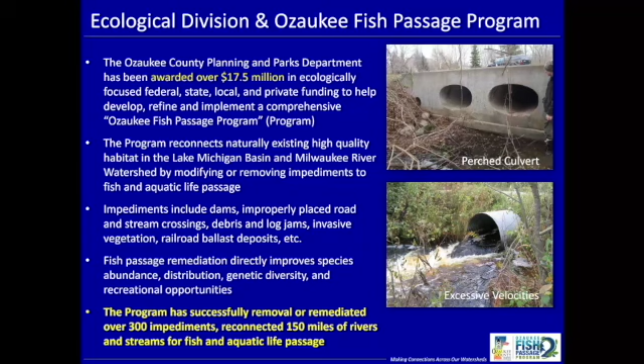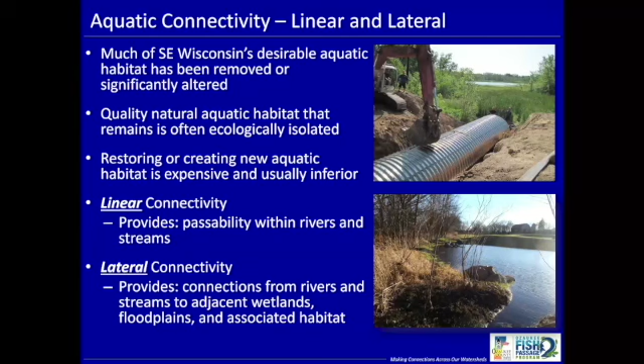Wanted to talk a little bit about the type of impediments. So we look at impediments both for linear connectivity, so kind of in-stream, provides passability within rivers and streams. So these would be your culverts, your dams, etc., trying to address those. But we've also been working on kind of corridor restoration, where we look at lateral connectivity. So that's providing fish and aquatic life with connectivity to adjacent wetlands and floodplains. Many of these organisms need those for spawning and reproduction. And so much of our work lately has actually been focused on kind of holistic corridor restoration, but we always start with linear connectivity, because first you need that stream connection and corridor.

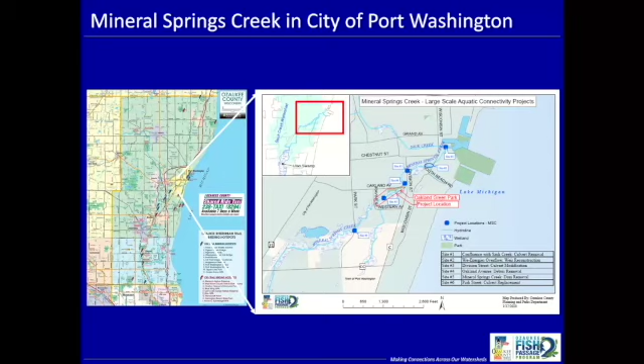So just a little bit more background on Mineral Springs Creek and its location. It's in the Sauk Creek watershed. So Mineral Springs actually drains into Sauk Creek, just about 100 yards from Lake Michigan, the mouth of Lake Michigan. You can see that is the purple colored watershed on the right-hand side map.

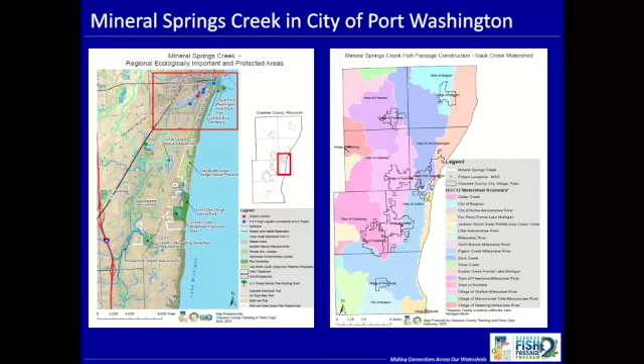And Mineral Springs Creek is actually in a really important regionally ecological area. Many of you are familiar with Port Washington. There's obviously the harbor, Lake Michigan, and Mineral Springs Creek comes right into that, to the harbor. But just a little bit to the south there, there's the 590 acre Ulao Swamp natural area, and then the other natural areas along the coastline, Fish and Wildlife properties, as well as Lions Den Gorge Nature Preserve, one of our county parks.

I have a number of videos, and I'm hoping that they will translate well here. So I wanted to show you first a little aerial view that we were able to get for the Mineral Springs Creek watershed, and I'm going to try and play it. So here we're looking south. The Mineral Springs Creek corridor is right where that lettering came up, the title.

You can see how close it is in proximity to Lake Michigan, and for those of you familiar with Port Washington, there's obviously the We Energies power plant, the bird sanctuary, Coal Dock Park, looking off to the east. As we pan around, you can see the harbor and downtown Port Washington. So Mineral Springs, we're backing up now on the corridor. It comes in right by the We Energies power plant.

And for a very urban setting, Mineral Springs Creek runs through the industrial park in the city of Port Washington. It actually has a very nice corridor, and I hope to show that to you tonight. But there you can see it in the foreground, an aerial view in proximity to Lake Michigan.

So I wanted to talk just a little bit more about Mineral Springs. It's about a 4-mile stream, so it's not super long. And as I mentioned, headwaters at the Ulao Swamp. So it connects to some really high quality wetland habitat, not only at Ulao Swamp, but along the corridor as well, over 195 acres. So for a short stream, it's got a lot of potential spawning habitat for all kinds of fish, particularly phytophilic spawners, which spawn in wetland areas, like northern pike.

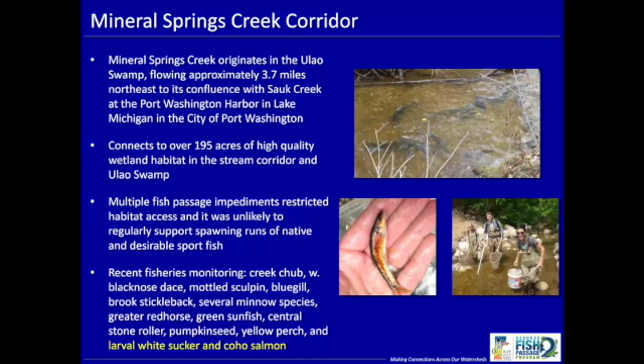But it's been impaired by a number of impediments that we've been working on removing, and I'll talk a little bit more about that. And we've also been doing a lot of fisheries monitoring. You can see there in one of the photos, steelhead. So we actually documented now for the first time reproduction of steelhead or trout species in Mineral Springs Creek, which while not a native fish, is part of the Lake Michigan system now, and an important sport fishery. But nonetheless, we have found that it's been productive for a number of species and many native species.

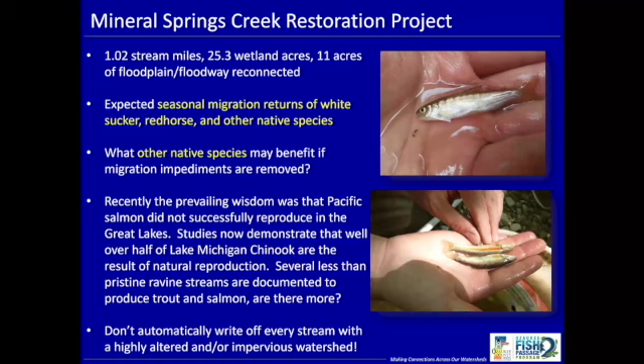So our restoration project aims to work on about 1 mile of that 4-mile corridor, working towards restoring about 25 acres of adjacent wetland habitat and about 11 acres of floodplain. And we're really focused on the native species. So we're looking at white sucker, redhorse, and other natives that need that habitat for spawning and migratory passage from Lake Michigan. And there probably are many other native forage fish species that would benefit by the work as well. So we're definitely looking forward to starting a project.

Restore and enhance adjacent habitat; particularly we have a focus on migratory birds and providing stopover habitat, because while it's in a very urban setting in Port Washington and in the industrial park, it does actually have a very nice intact corridor along that stream. And then the coastal resiliency part also comes into protecting infrastructure from future storm events, and I'll talk more about that.

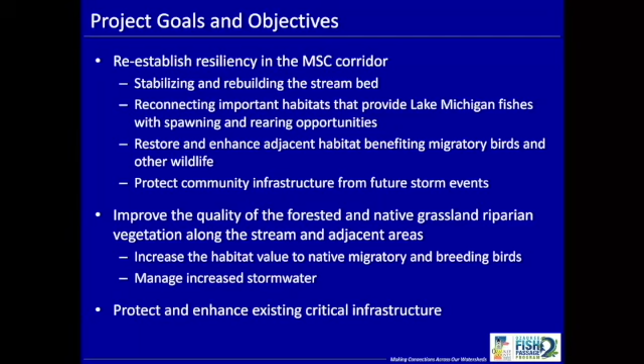So at the upstream end of our past work, and hopefully our future work on the corridor, is Park Street. Those of you familiar with the city of Port Washington, South Park Street, we did some work there, and I'll talk about that. That is also the top end of our future corridor project.

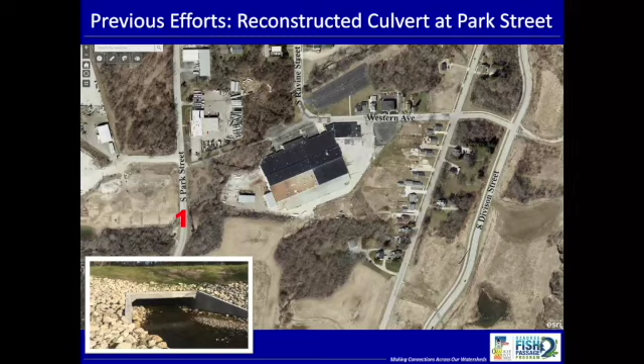But historically at Park Street, as you can see in the photo here, there were 4 barrel culverts providing significant impediment to fish passage. In those culverts, the flow was too diffuse and spread out, so it was actually a low flow barrier. In other words, there wasn't enough water for fish passage. The culverts were all structurally failing, and they were extremely long.

So we undertook a project to remove all of those culverts, in conjunction with a private contractor and our county highway department, and place in a new single concrete culvert. And we put some in-stream habitat through that culvert so that the stream corridor through the culvert looked a lot like the stream corridor outside of it, providing in-stream habitat for fish.

And the project, for those of you curious, was just about $225,000. It was actually a fairly large project with a lot of utilities and so forth.

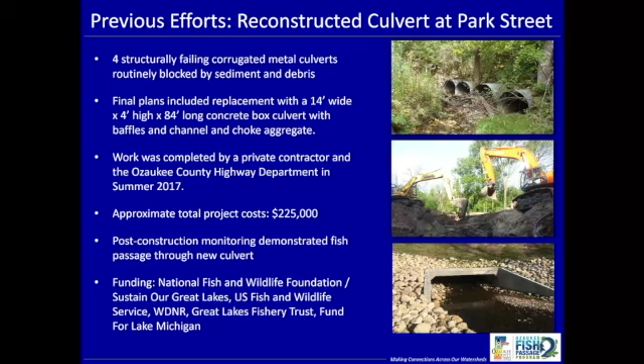So I'll transition from that project at the upstream end to South Ravine Street, and this is where our current efforts are going to be focused. For those of you that are familiar, the corner of Ravine and Western, seen there in your photo.

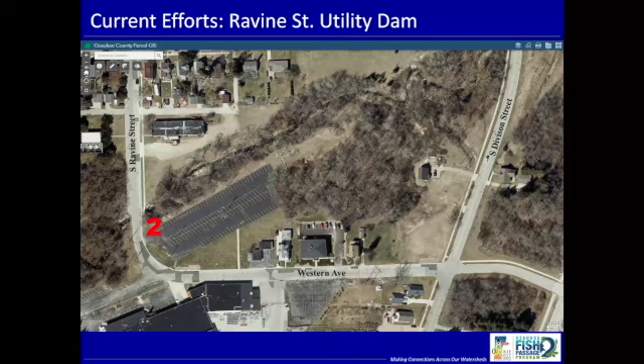In 2018, and those of you in the city of Port Washington would know this, we had a very significant rainstorm. A little over 9 inches of rain fell in less than 24 hours, which was about a 500-year flood event. That flood event created significant erosion throughout Mineral Springs Creek, which is still a little bit flashy because of the land use around it. It was so powerful it scoured the stream bed about 2 to 3 feet down.

One of the detriments of that was that there are a couple utility crossings across the creek, and the primary one you see here in the photo was a large sewer main that supplies the industrial park. That sewer main historically crossed underneath the creek bed, and when the creek bed scoured down, it exposed it, and it was hanging above the creek bed. You don't want a sewer main, especially that size, unsupported from below.

So the city of Port Washington undertook some emergency measures to shore up that main sewer line that served the industrial park. But in doing so, unfortunately, it created a fish passage impediment, isolating all of our work at Park Street, the first one I showed you just upstream from here, negating all that work and funding, and it created this dam as you see here.

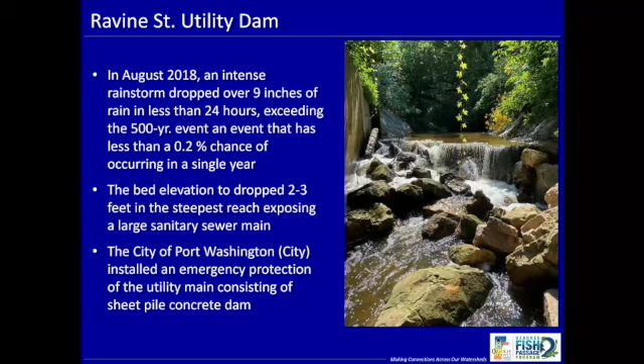What they basically did was drive sheet pile on either side of this sewer main and then pour concrete over it, essentially making it impassable. In this next slide, you can see it essentially created a dam.

And you can see here's a number of fish. I know they're a little hard to see within the rocks, but a number of steelhead and trout and fish that were abandoned that couldn't get over that rock spillway or the dam. And as I mentioned, it kind of isolates the whole upper watershed now, again back to where it was before we did some of the previous work that we had done on Mineral Springs Creek.

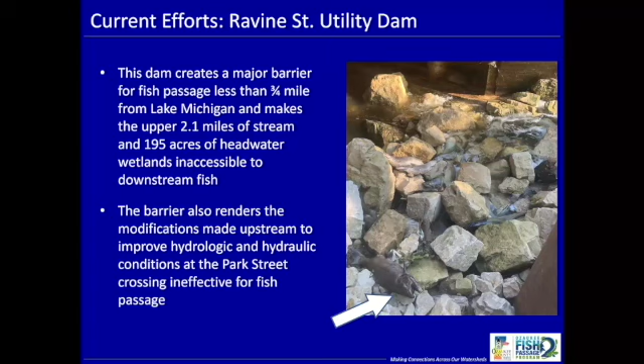So our current project is to remediate this effort. So here's just a video. Oh, I guess it's not playing yet.

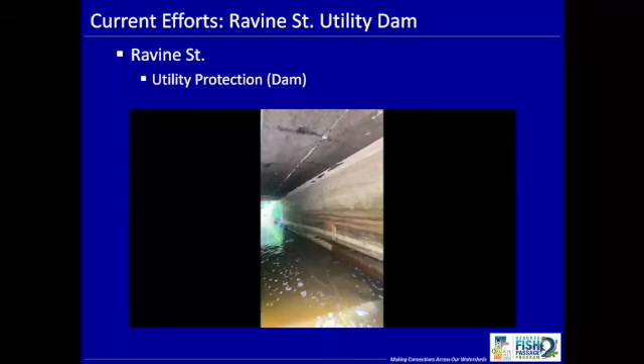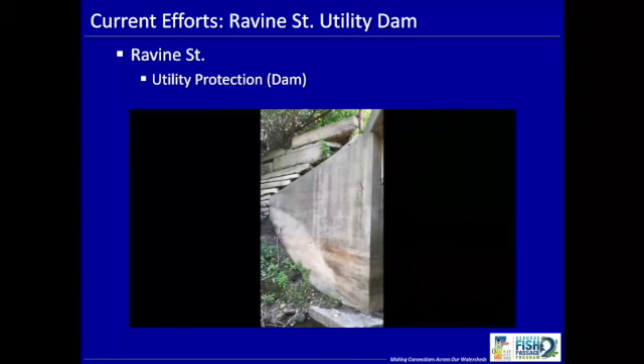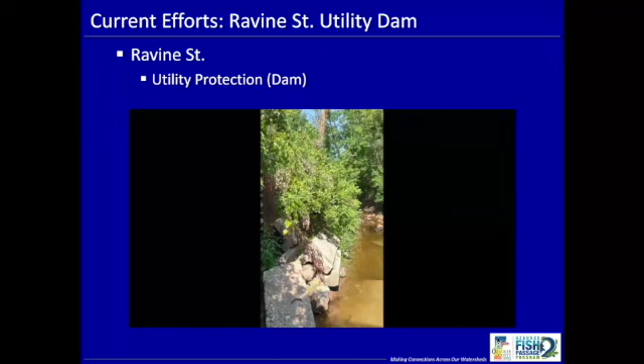Here's a video of that utility corridor and the dam as we get to it here. And you'll see it goes then through a bridge, which is actually a bottomless culvert technically, so that itself is not a fish passage barrier. You can see that there's some infrastructure issues with the culvert or bridge itself that need to be repaired. But the passage is good through the culvert as far as aquatic life is concerned. But there is obviously some additional infrastructure issues there.

But in addition to that, we want to fix the stream corridor and the in-stream habitat and make it passable for fish, but we are also looking at this more comprehensively by restoring the corridor, because we know that that storm event also created a lot of significant erosion, which I'll show in upcoming slides. So we're looking at doing some vegetation restoration within the corridor specifically, but then also hopefully in Oakland Green Park, so where we can, adjacent to the corridor, we can provide some upland habitat as well.

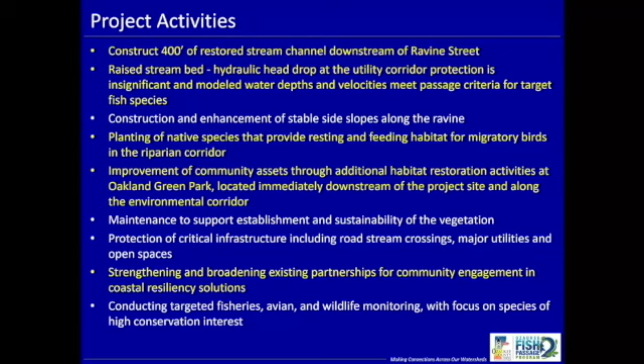And all of this is in an effort to continue to strengthen partnerships, and particularly like the neighborhood partnership that Western Great Lakes Bird and Bat Observatory has, work with volunteers and get people involved in some of this community restoration work.

This next slide, I'm working downstream now as it comes up here. So this is kind of site 3. So another part of our funding request has been to protect critical infrastructure. So that's both public, like the sewer main I mentioned, but also private infrastructure. So there are a number of existing buildings immediately along the Mineral Springs Creek corridor, the parking lot you see there, private business. And so we want to make sure that those sites are protected too, because with that storm, we had significant erosion of the banks. And hopefully this video will work here in just a minute.

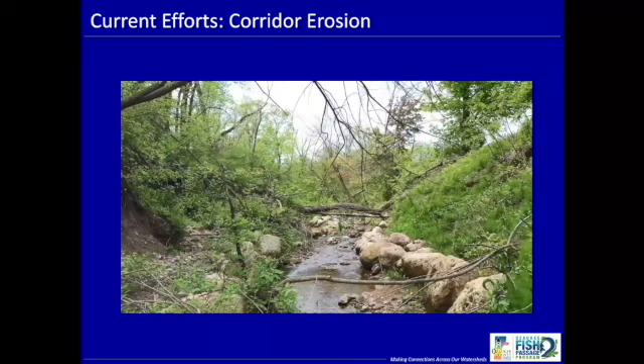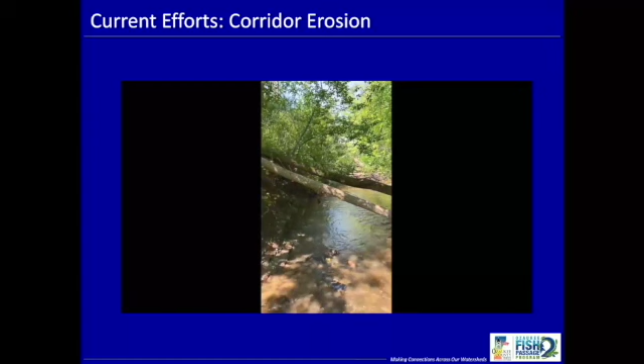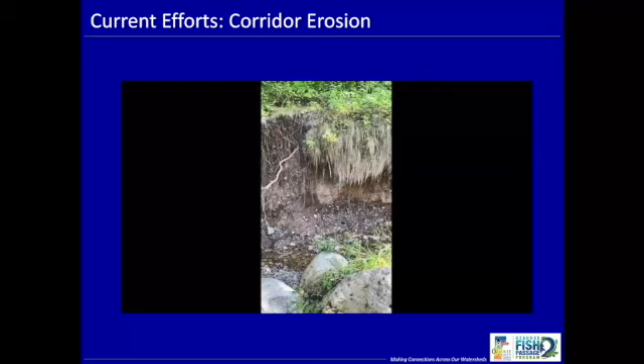So this is at site 3. This is kind of showing the aftermath. We had significant bank erosion that really tore out a lot of the vegetation, made unstable steep banks through this site. You can see the significance of it there. That's one of our interns. She's only 5 feet, but still a super high bank. You can see it scoured right underneath all the vegetation. So part of our work will be to restore that corridor habitat as well.

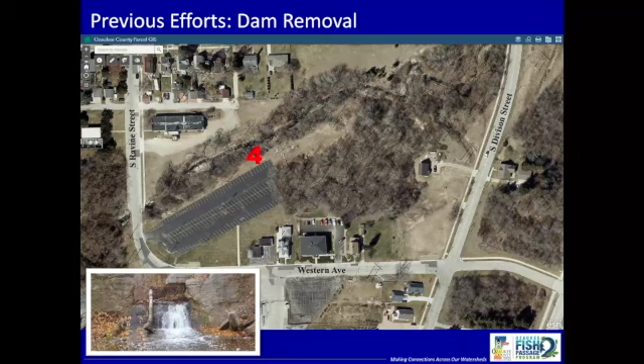Working our way downstream as this next slide comes up, this is both a current effort and a previous effort. So our previous effort actually was a dam removal at this site. You can see in the lower left-hand corner the dam just before we removed it. And I just wanted to take a minute to talk about the historical significance. So Mineral Springs Creek is actually really interesting. They used to actually bottle water out of Mineral Springs Creek and sell it. There was actually a bottling plant at the south end of the street. The building is still there actually in the city of Port Washington.

They used to bottle water, but they also used it. You can see here in that historic photo of the dam, it doesn't look anything like this now, of course, but where that parking lot was that I showed you, they used to dam up the creek and create a large impoundment, and they used to use that for ice blocks to put the fish on. So it supported all the fishermen in the port coming in with their fish. Back then they didn't have refrigeration, so they would cut ice blocks out of the dammed water. So that's why the dam was there originally. Obviously, it hasn't functioned in that capacity in many, many years.

You can see on the lower right-hand corner, the dam had been failing over many, many years, although it was still a significant barrier to fish passage, which you can see in the lower left-hand corner. All those dark shadows are fish that can't pass, primarily coho and chinook salmon, but many other species wouldn't be able to pass as well.

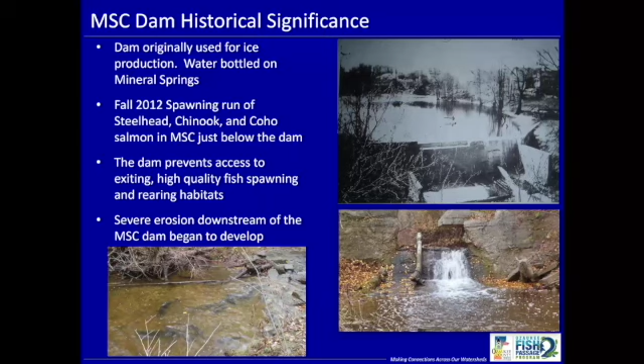And I just have a little video to demonstrate that not only was there a dam, but a large concrete pan that took the force of the water coming over the dam. Oops, that one didn't play. Let me see if I can go back to it here. Give me 1 second. Hopefully I can get this one to play.

So it has a large concrete pan, and you can see that that's problematic even for the strongest swimming fish. This is some Chinook salmon and trout trying to make their way up not only what's remaining of the dam, but also that concrete pan. So we worked towards removing that to restore the aquatic connectivity. I apologize, I think the video is a little bit slow here, but hopefully you get the picture.

So it was a significant impediment. These salmon are some of the strongest swimming fish, so we know if they can't pass, most everything else is not going to pass either. And so often when we talk about impediments like this as barriers, they're almost complete barriers to aquatic passage.

So just real quick on that dam removal, we should get to a summary slide here in a second. We did a full dam removal and restored the corridor. We did the design and engineering, and then our highway department actually did the demolition and restoration work, and this was done in 2016. The project was very cost effective at $85,000. Very few dam removals you'll find that cost that little, and this was a significant one.

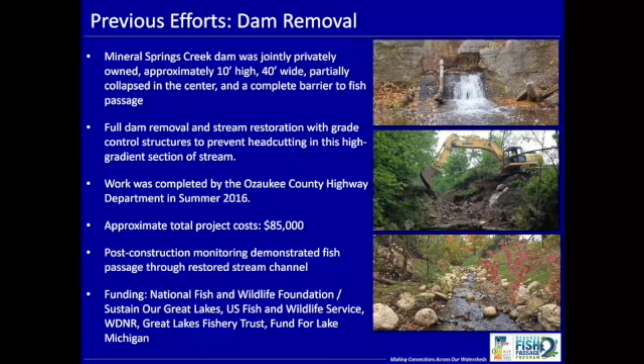But we've found that using our highway department has actually been extremely cost effective, and you can see here some of the funders and the stream corridor as it existed after our restoration work there on the bottom. And I just had another video here coming up. I'll try and play this one too. I won't probably let it go the full length. Whoops, it didn't work. Let me see if I can go back. I thought it would be interesting if you can see this.

This is how you remove a dam, kind of brute force. We actually just chipped away at the dam. Fortunately, it was significantly compromised already. But it was a high dam. Originally, I think it was a 10-foot dam, and you could see that from those historic photos. So this is our highway department doing some of that deconstruction work. Maybe you can see in the back there the excavator working on the channel and the restoration work that we did.

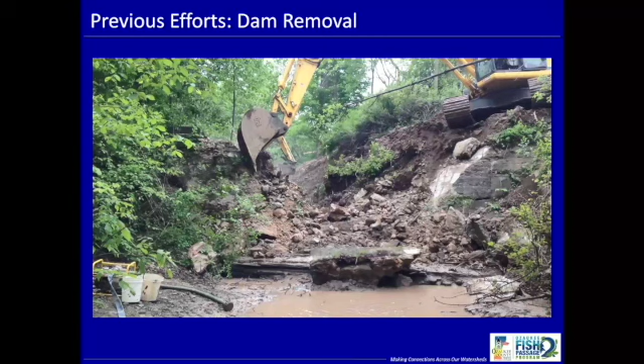I'm gonna jump into another video right away here. Hopefully it'll transition. And this video just shows, even after removal of the dam, the downstream end. So this is the end of our project as this video pans downstream here, and you can see that there's significant scour below the dam. Unfortunately, we didn't have funding at that time to address that.

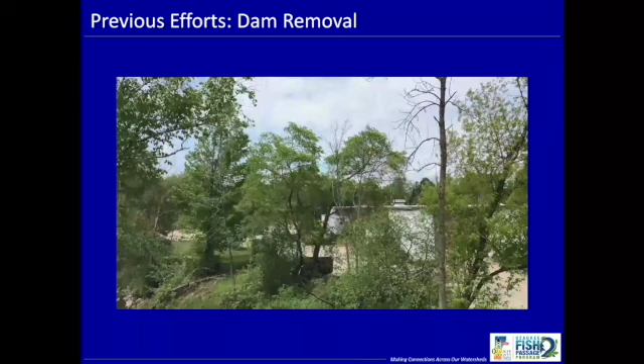And then this just shows again coming up out of the trees here, proximity to the downtown and Lake Michigan. You can see the We Energies power plant there in the background. And this is coming back down with our drone footage here, looking upstream at the same site, that private infrastructure that I talked about.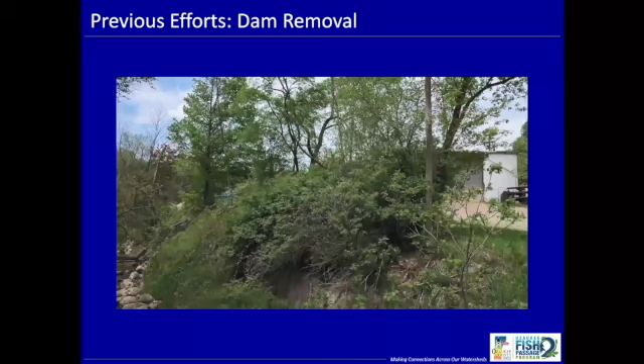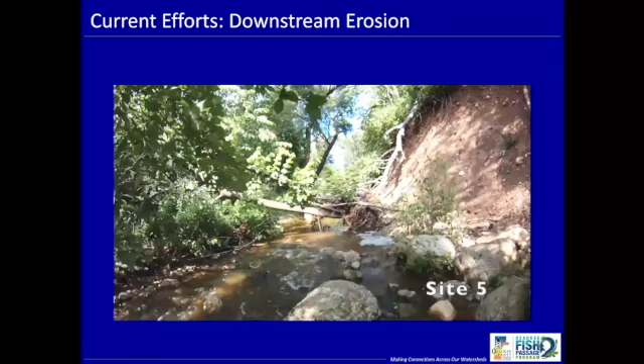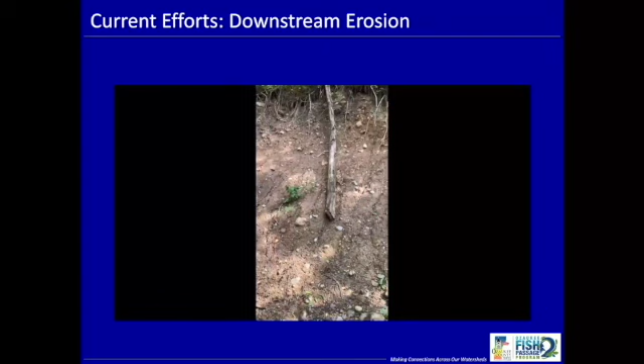So I'm going to keep moving on downstream to Site 5 here. And this is just part of what we hope to work on, some of that severe erosion that again occurred along the stream corridor. And again, just a video tour of that stretch of the stream. So this is below the dam. Some of this erosion had happened prior to that storm event in 2018, but some of it happened during that event. You can see steep, high scour banks that we hope to work on restoration for.

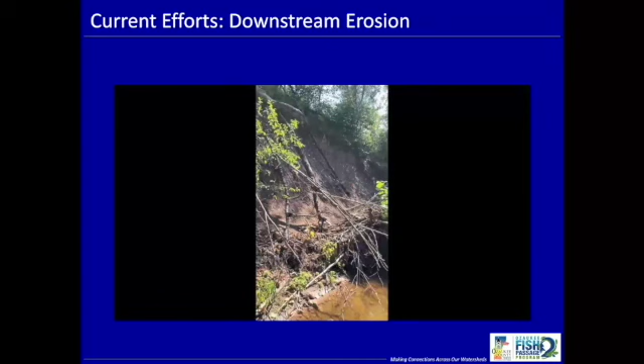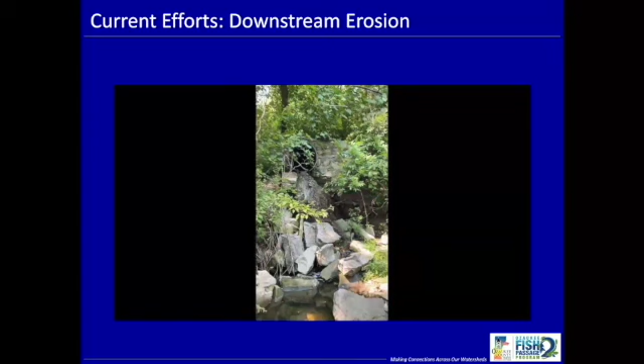And there's also some city infrastructure that comes into Mineral Springs Creek, and we want to try and address that too. So you'll see here coming up as we pan along the side of the bank, I think you'll be able to see not only the downstream end, but there's the stormwater pipe that comes into Mineral Springs Creek. So trying to do a little bit better addressing of that stormwater as it comes into the creek so we can protect the creek corridor as well.

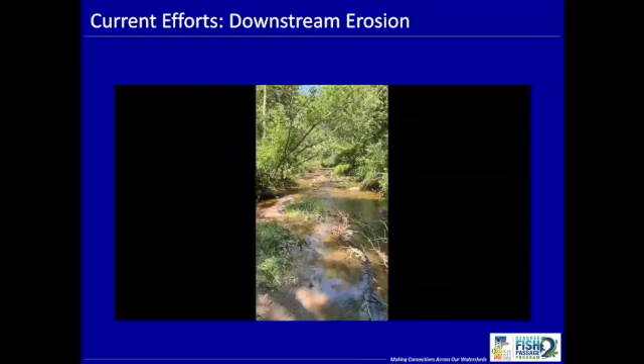And then keep on moving downstream, section 6 here, if you will. And this is an area of actually some really interesting wetland area. This is actually a particularly nice place to go birding. There's some really interesting habitat down here. So there are some adjacent wetlands that we hope to do some restoration efforts on.

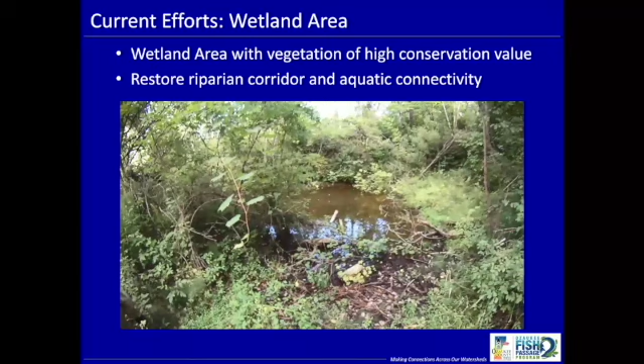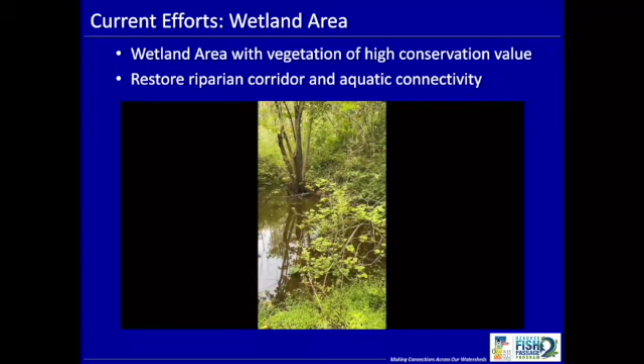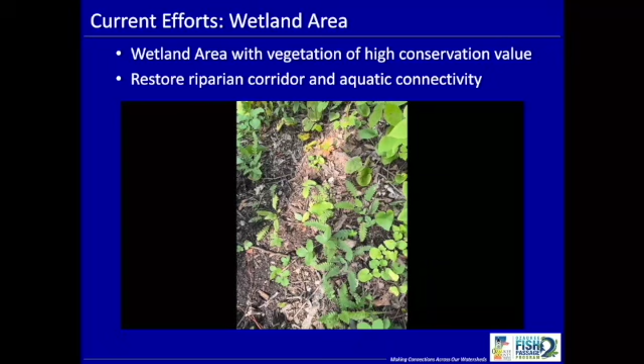And while there are invasives and other things in there, something that we hope to work on and improve, there is also some really good vegetation within that corridor, some native dogwood, and some other species that have a high conservation value that we hope to protect. So very interesting what exists right in the backyard there in that very urban corridor. So we hope to do some of the wetland restoration work in that area.

And then moving down further, this is what I mentioned. There's a tributary stream that comes in just below that wetland complex, a tributary to Mineral Springs Creek. And again, just going to show you a little video of that, where that tributary stream comes in. And we want to do some work there because this is also a great area for spawning habitat.

You can see there the riprap on the left-hand corner, that goes up to Oakland Green Park, just to give you a little perspective of where you are in the stream corridor. But overall, you can see it's a very nice stream corridor. And we've found that Mineral Springs Creek is extremely productive from a fishery standpoint.

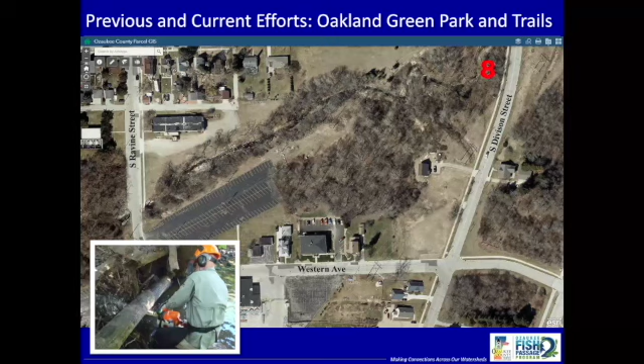And then keep moving on downstream. This is Site 8. So this was a site adjacent to Oakland Green Park. So this is both previous and future efforts. So some of our previous efforts were to remove a number of log jams, significant log jams. We don't like to take woody debris out of the stream because it provides good habitat, but when it actually creates an impediment is when we do the removal.

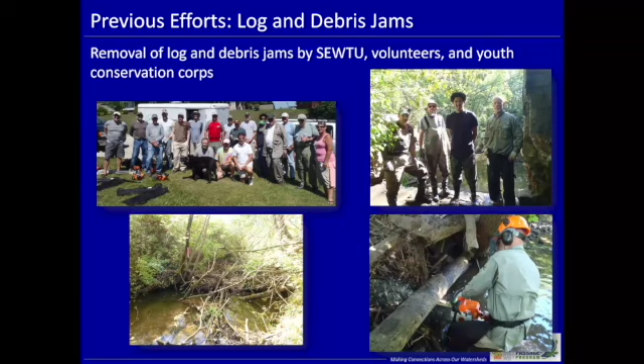So in this case, we actually worked with the DNR warden, you can see there, and a big group of Trout Unlimited, and they helped us actually chainsaw up and remove some of these really significant log debris jams. We also, just a little bit down at Division Street, worked on restoring a culvert for passage. So you can see that little bit of lip there.

Our native fish don't jump, and they are not strong swimmers with high velocities, and in this case, you can see the dispersed stream flow because it's spread between two culverts. So a lot of times the flow is so thin they can't get up either. So the restoration on the right, that's a before and after, you can see we filled in the scour hole, and so there's no longer a lip on the culvert.

And if you look real closely into the culvert, you can see we put what's called some baffles. They're actually curb stops to create a little low flow channel so that the flow can get concentrated and provide enough depth for fish passage upstream. So this is at Division Street, work that we previously did.

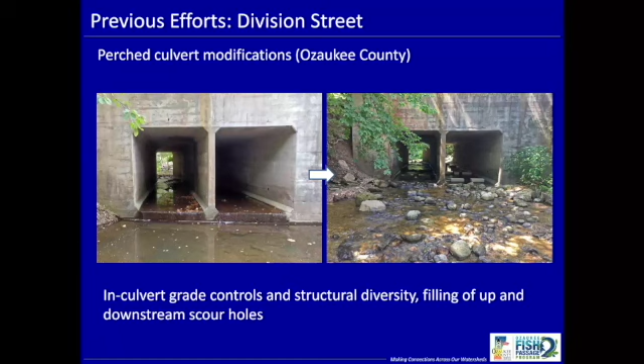And this next one is a video just showing what we hope to do future work on. It's just showing proximity of that corridor to Oakland Green Park, which is a nice lawn area, but we're hoping to work with the city and Great Lakes Bird and Bat Observatory to do some restoration work here to make it better habitat for upland and migratory species of birds and semi-aquatic life.

Here you can see we hope to improve some of the public access from Oakland Green down to the stream corridor. This is kind of a self-made trail and bridge there. We hope to do some improvements on that public access, but as this next slide will show, what we're hoping to do in Oakland Green Park is some native prairie restoration work, native prairie plantings, hopefully get in some bluebird nest boxes.

And I need to talk to Jen about the extras that she has. But we hope to do some restoration here, and I think it's a great opportunity, and the city seems willing to work with us on that as well, and would provide a great buffer to that stream corridor.

In addition to the prairie work up in the grassed area of Oakland Green, we also hope to work on tree planting along the entire corridor, so not just at Oakland Green, but along the whole corridor. And we've done similar work like this with volunteers, youth conservation corps groups, and other partner groups like Ulao Creek Partnership. This is an example at Ulao Creek where we've done a lot of tree planting and habitat restoration, and we hope to do the same thing through the Mineral Springs Creek corridor.

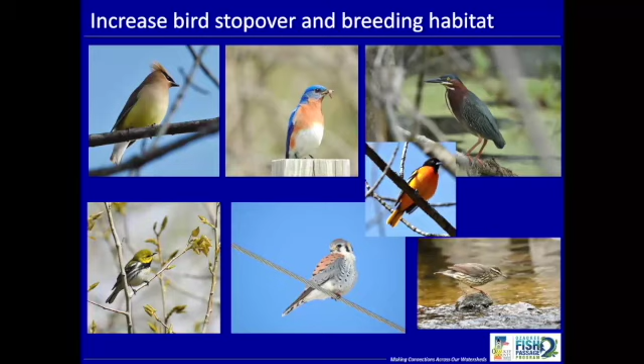And then I'm going to move down to our second last focus area site. So a couple of years back, we worked with We Energies. The downstream end of Mineral Springs Creek goes by the power plant, and they put in a relief weir, or a dam, if you will. And you can see it there in the lower left-hand corner.

What happened is, not even under significantly high flows, even at modest flows, the creek would get diverted because the bed was filling in below the dam. The sediment was falling out at this dam because it was right on a turn, and it was filling in, and so the water would spill out over the spillway, which was only intended to spill during heavy flood events.

But what's happening is that it was actually going over that even in a 2 or 3 year storm event, which isn't all that significant, just a regular rainfall. It was going over, and what was happening is the lower part of the stream corridor was basically dry, completely dry, because everything was going out the diversion.

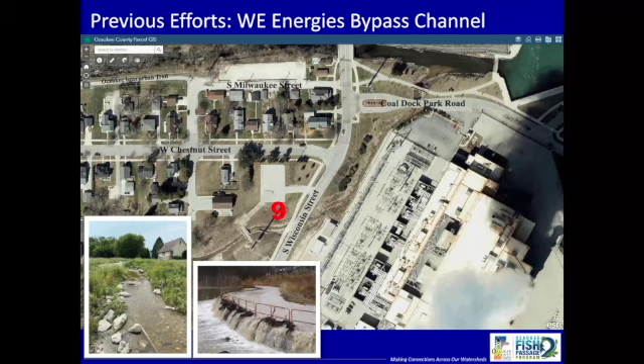So we worked with We Energies to create a new bypass channel that was not on a turn where all the sediment and materials would drop out, which also is saving them a significant amount of dollars in maintenance activities. For those of you familiar with City of Port Washington, you've probably seen it, but we've created a separate diversion channel that actually follows the old stream channel before it was diverted for the power plant and the overflow. We created a new stream channel that can actually hold the base flow of the creek without filling in, so we don't get the same impairment.

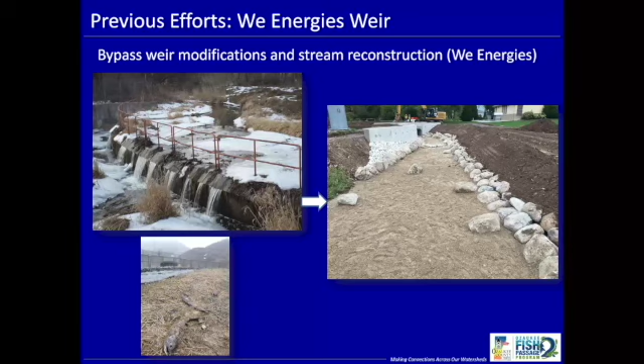So this video will show you that stream corridor as it exists today. It's holding that base flow. You can see We Energies is still doing some work here on the power poles and stuff. So this is another site where we hope to do some upland restoration with prairie plantings. But you can see that stream corridor is much better now. There's a base flow that runs all the way down through the passage underneath the street there.

And this is the overflow that I was talking about. It's dry like it should be, except under major storm events to protect the power plant. But we can keep and maintain a base flow all the way down along the power plant through this really nice habitat. And again, under low flows, that does not become a barrier now.

And the last site, most downstream, is the confluence with Sauk Creek. And the whole thought about working on Mineral Springs Creek started with the City of Port Washington's efforts at Coal Dock Park, and actually the removal of this significantly perched culvert you can see in the lower left-hand corner. This was done as part of the Coal Dock restoration, and it was the impetus for us to work on all the rest of the work upstream with the dam, etc.

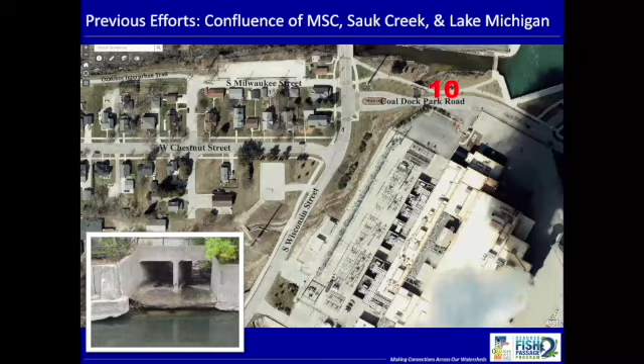That was a significant passage barrier. Nothing got by it, and it basically shut off all of Mineral Springs Creek, which, by the way, in historic documents, there were huge runs of white suckers up Mineral Springs Creek, so we know it was historically very productive. And there you can see what the city of Port Washington did. They fully removed it, put in a new wooden bridge, and that access and aquatic connectivity is much better now.

And this next one is just going to show you a video of that most downstream end and the confluence with Sauk Creek. That new entrance, which is so much better than the old culvert. And again, you can look upstream to Sauk Creek here, which also provides habitat. As I showed in that first slide with the watershed, Sauk Creek's a very big watershed, and Mineral Springs Creek is part of that.

So with this nearing the end here, I just wanted to provide you again an overview of the Mineral Springs Creek corridor. We got some really great drone footage, and this again just shows you that corridor coming up from the top end, looking down. So there are some significant industrial plants and stuff, but if you follow that wooded path down, that's Mineral Springs Creek corridor. Its proximity to Lake Michigan and the power plant.

It really is a hidden gem, and something that we hope to bring back to its former prominence and importance with the fisheries, but also hopefully make some improvements with the upland habitat along that corridor as well. We've worked with a number of partners on the previous work here, all outlined in blue, and we hope to work with some new partners like Western Great Lakes Bird and Bat Observatory, and also the newly formed Ozaukee County Watershed Coalition. So we're really excited about continuing this work and making Mineral Springs everything it can be.

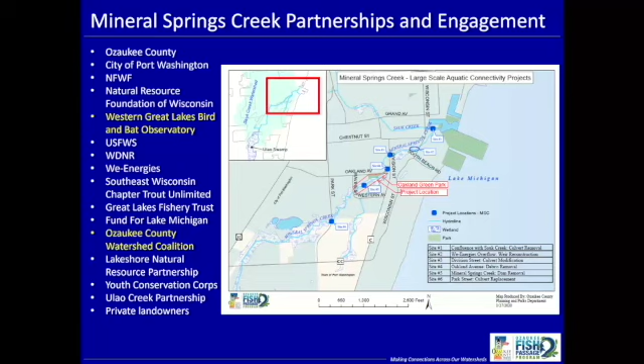And with that, I'm glad to take questions. This last slide just shows many of our funding partners that have helped with this work over the many years that we've been working on Mineral Springs. And we hope to hear about a large grant through the National Fish and Wildlife Foundation, hopefully positive news, to continue that work that I outlined. So with that, I'm glad to take any questions, and thanks so much for the invite and the time tonight.

Thanks, Andrew. So we have one question, and I really hope other people take on this opportunity to ask more questions. But Diana is asking, what was the initial concern that brought on this active project?

Yeah, I would say it really started when we knew that Mineral Springs Creek was historically a good fishery, so we had a lot of data on that, and we were doing comprehensive fish passage assessments throughout the county. So Mineral Springs Creek was on our radar, but what started to make it really possible is the work that the city of Port Washington did at Coal Dock Park, removing that first significant downstream culvert. Once they did that, we started seeking funding, and the next big one was the dam removal, but everything in between.

So we knew that, and since that time we've been doing ongoing fisheries monitoring, just like Western Great Lakes Bird and Bat Observatory has done monitoring for birds and showing habitat improvement, and with the neighborhood habitat improvement project, we've seen that improvement with the fisheries. So it was kind of having an inventory, knowing that Mineral Springs Creek was important, but really that first City of Port Washington culvert project kicked off the rest of this work.